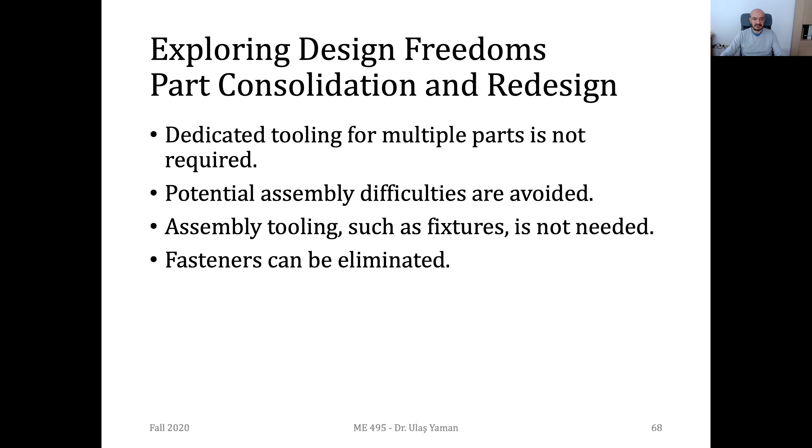And obviously, the quality of the resulting assembly will be better than the quality of conventional assemblies. The only problem is that you cannot easily do servicing, since if one of the parts is broken, you cannot simply remove it. You need to actually manufacture a completely new assembly.

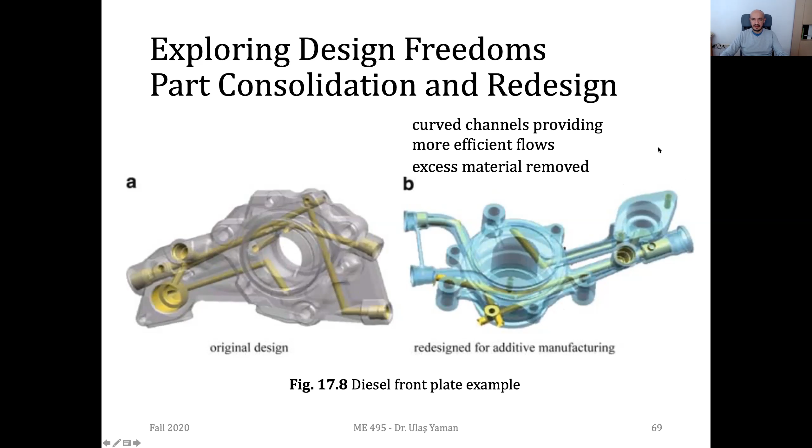And now let's have a look at hierarchical structures. We said that this is another capability of additive manufacturing, and see how we can use this capability. We may have nanostructures, microstructures, mesostructures, they're all possible. We can add specific textures, since, as you know, some of your friends are working on textures. We can add some textures onto surfaces. These are all possible with additive manufacturing.

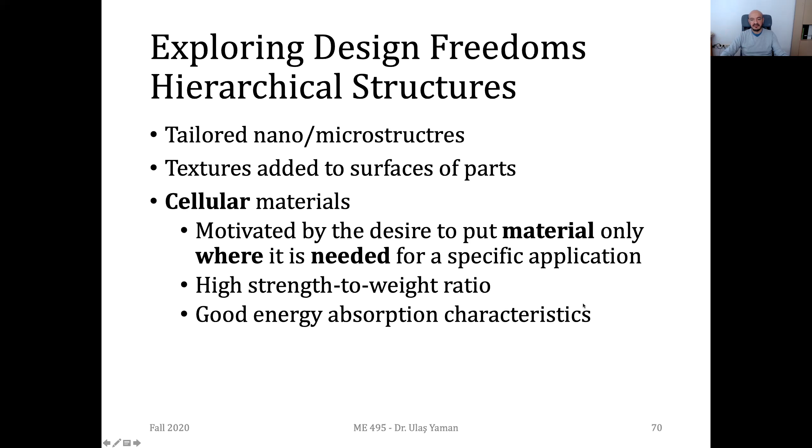We can have cellular materials. Lattice structures can be considered as cellular materials, and with the help of them, you can increase the strength to weight ratio of your part. With less weight, you can obtain the same strength performance from your design. Or you may have some special cellular structures, such that they will be absorbing more energy compared to the conventional design. Their thermal and acoustic properties may be improved with the help of such special designs.

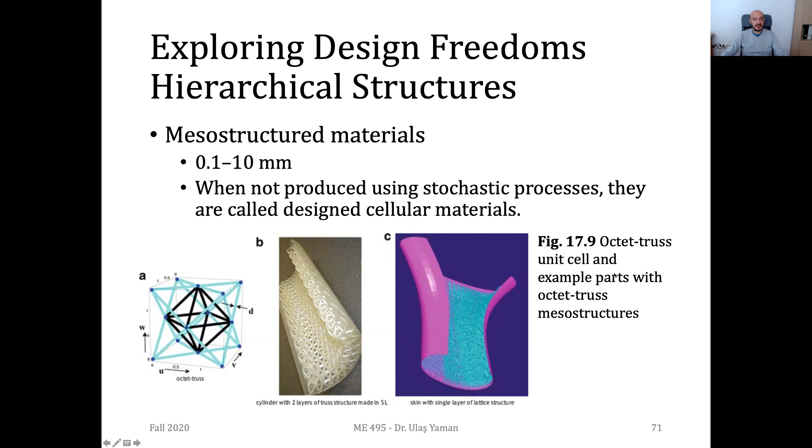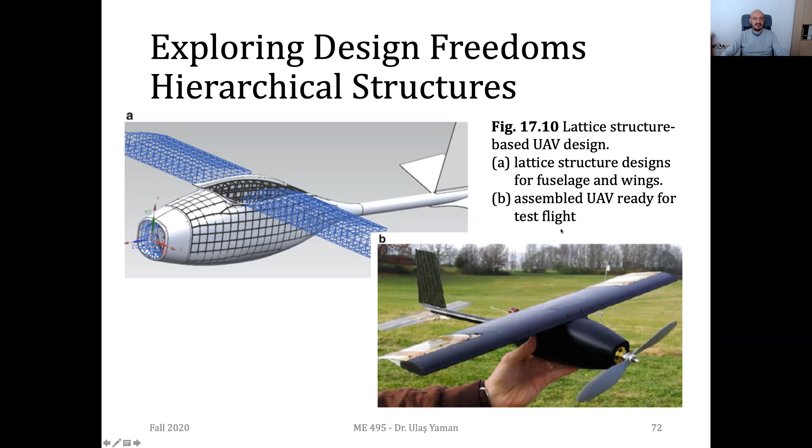Here are some examples. You see a UAV, and they are trying to decrease the weight of it, since in the aerospace industry, weight is a big challenge. They're always trying to decrease the weight of such flying vehicles. And lattice structures are a good example for that. There are many studies on such approaches. People are trying to decrease the weight of these products by using lattice structures. This is an example of it. And as I said, if you're interested, you can search for it and check some papers.

And another thing is that people are all sharing these designs on different websites. These are from Cults3D, for instance. You can even sell your designs on such websites.

I have an account there. I put two designs, but I was not actually able to sell any of them. You can check me on cults3d.com.

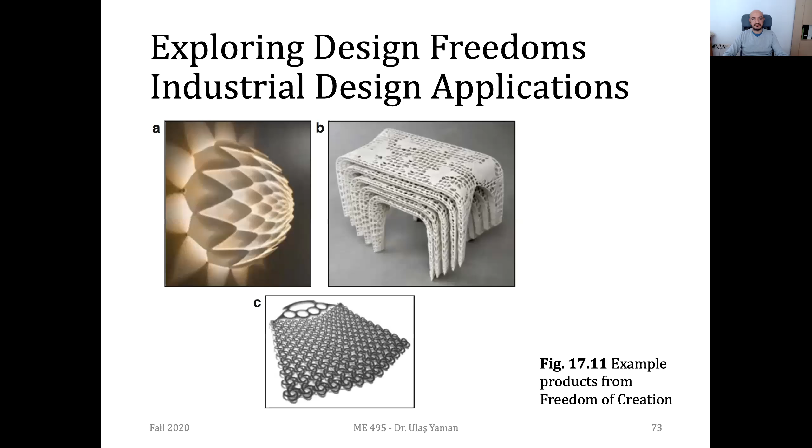Now we'll discuss another issue, but before that, if you have questions, we can discuss such design applications, design freedoms. Why do we need to do consolidation? How to have lattice structures? Any questions, guys?

Okay, then let's discuss the challenges we have on the computer design side once you have these lattice structures or weird designs. In such lattice structures, you have thousands of features. You have many little microstructures. They need to connect to each other. They have many trusses, beams, struts. So they will all increase the size of your files in the CAD software.

And if you have material compositions, that will be another challenge. You need to define the material of each region, each cell or structure. And this will always increase the overall size of your CAD models. And sometimes you may need to have different physical and mechanical properties in specific regions. Again, that will be quite a burden on your design files.

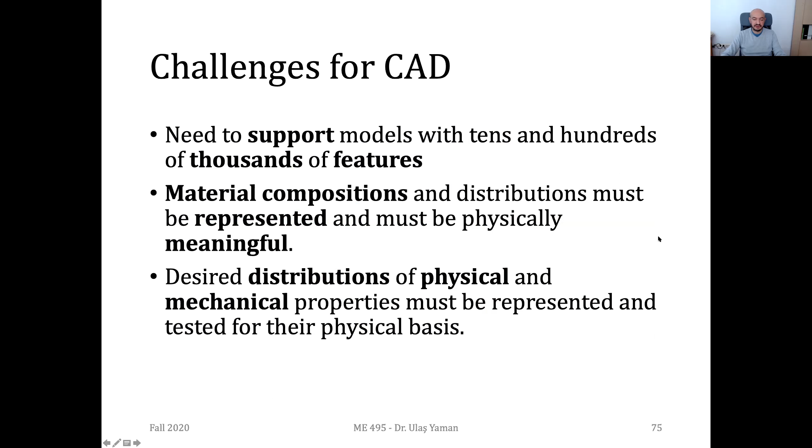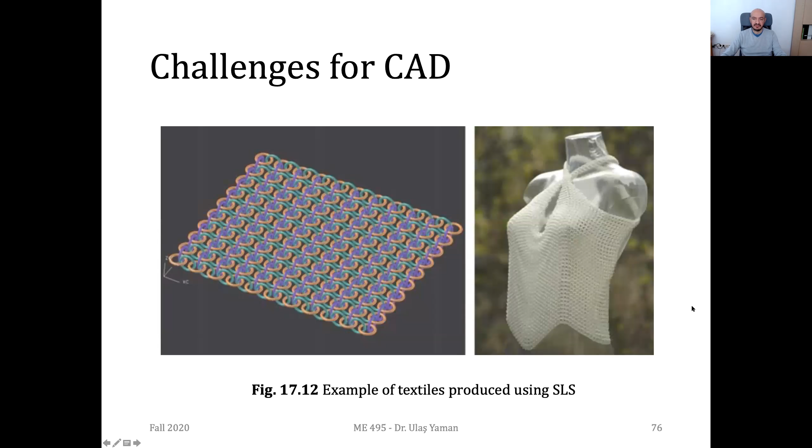Here you see an example: people are using such lattice structures for textiles, and they have printed this one by using selective laser sintering. And obviously the size of this dress is maybe around 100 megabytes. It's a huge number for CAD models. Here you see a kind of a dress. As far as I remember, they printed it in SLS or SLA. Let's check it.

Any questions, by the way? This is called Kinematics Dress. You can see how they fabricated it.

Since they are using many joints, such little triangles. So this is the compressed dress. So instead of using this huge volume, they compress it by 85%. Any other questions, guys, on this example?

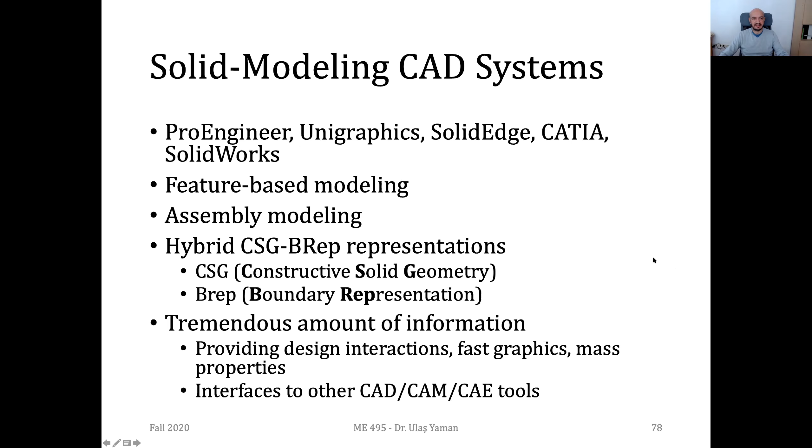And we said that in such complicated designs, such lattice structure cases, we have a tremendous amount of information, and your CAD, CAM or CAE software should be able to handle all these huge amounts of data. And in order to have a proper transfer between CAD, CAM, and engineering software, we need to use some standard files. The most common one is STEP files. With the help of them, we can exchange data between these software. But they're not obviously for the manufacturing. It's just for representing the geometry.

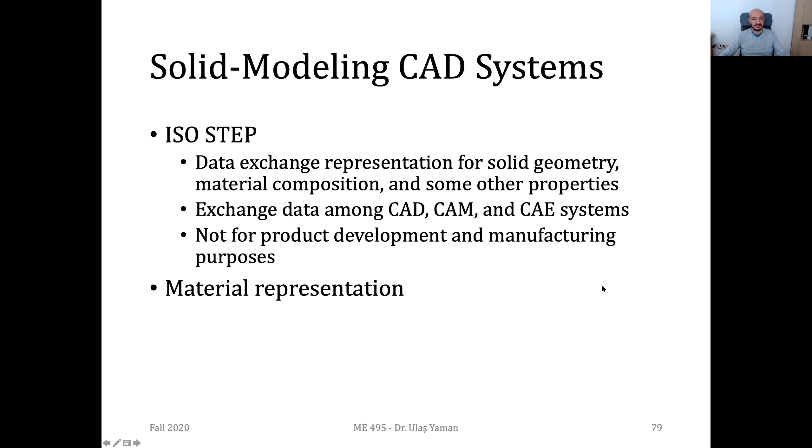And in some of them, you need to have extra files to represent the material throughout your design. And even, for instance, in such an extra file, you need to define these graded interfaces between the regions. You may have smooth transitions, abrupt transitions. These are all stored, all defined in the material representations.

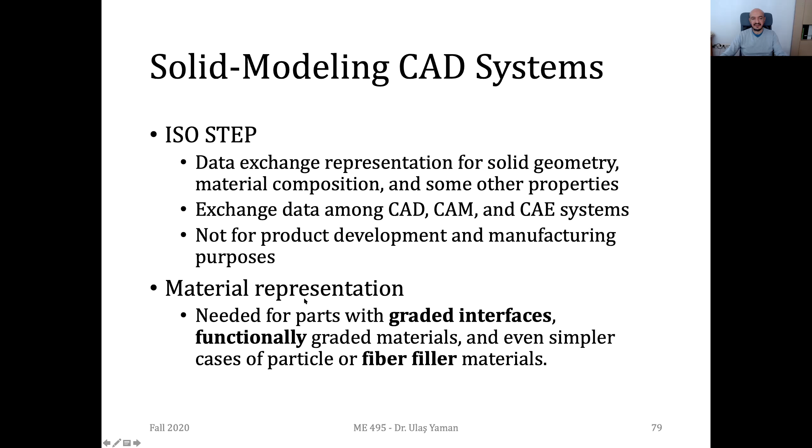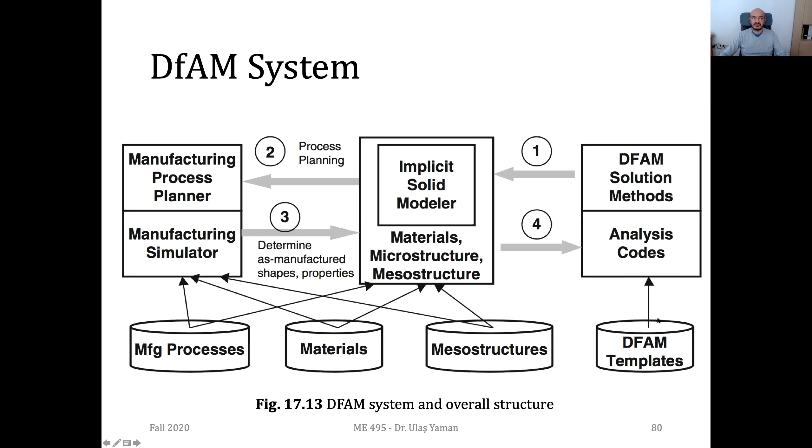And then we need to do process planning. You need to do a kind of simulation to check whether it's possible. And while you are doing a simulation, you need to be aware of the processes, the materials, the properties of the microstructures. And then if your simulation is fine, you can do some little modifications. And lastly, analyze the code and do the printing. But at the beginning of your designing, you should be aware of these templates, the main rules for design for additive manufacturing.

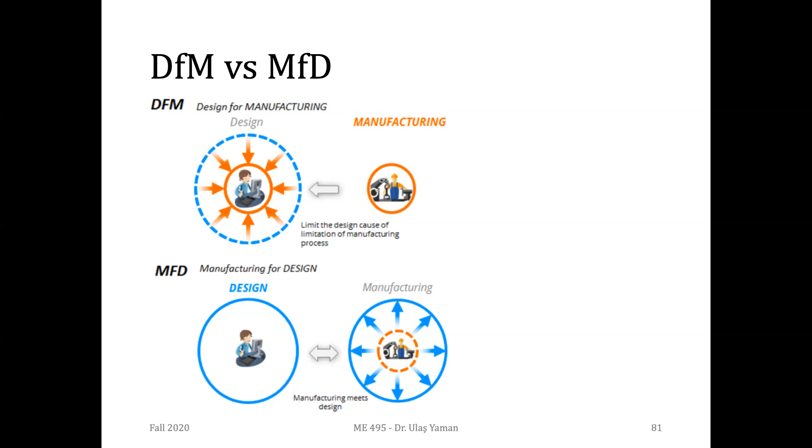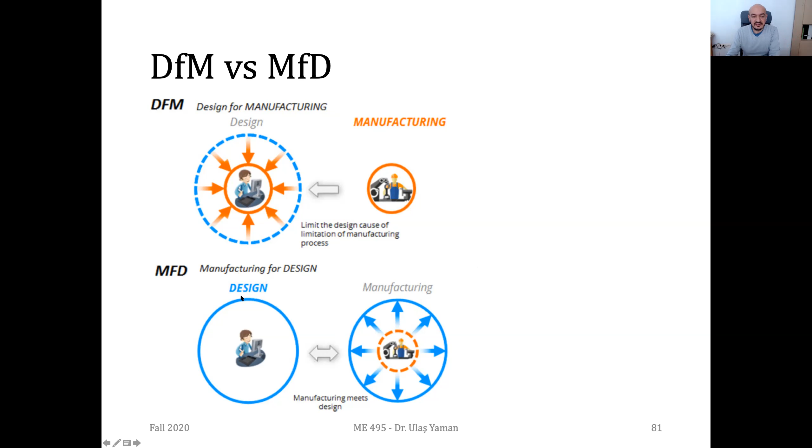Yes, this is the main difference. In the first one, we have the limitations due to the manufacturing capabilities. For instance, your company may have just a milling machine, then your design should include milling processes. But in manufacturing for design, the designer has no limitations. They have infinite freedom, and they can design any kind of weird shapes. So they don't have any limitations, in summary. But this time, the manufacturing side has some problems, and they need to overcome them by using maybe additive manufacturing or other novel manufacturing processes to respond to the needs of the designers. This time, as you see, the burden is on the manufacturing side.